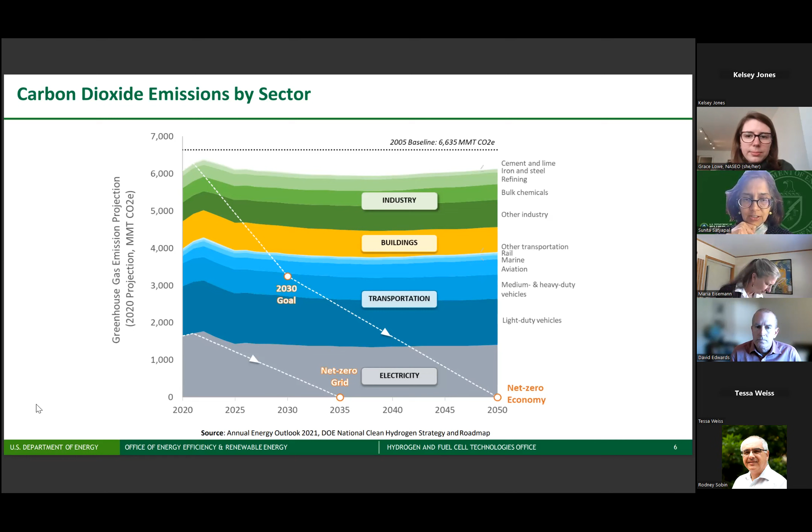And if we go to the next slide, this shows, I think, hopefully many of you are familiar with our H2@Scale initiative shown on the left, and really looking at all of our resources. Once we produce that hydrogen, use it as a fuel, as a feedstock. And there are two main documents for those who are maybe not as familiar with the DOE program: the program plan, which was published in 2020, and then the national strategy, which was issued as a draft. And we've had listening sessions as well with some of you on that.

And then the other thing I wanted to highlight just in the org chart picture is, again, there are many new offices involved in hydrogen on the federal side, but we really are trying to focus on cohesive, coordinated efforts. For those familiar with the office alphabet chart here: renewables, fossil with CCS, nuclear. We have a new Office of Clean Energy Demonstrations, our Loan Program Office. On the science side, ARPA-E, science, and cross-cutting supporting offices like the Office of Technology Transfer, International Affairs,

and so forth. So anyway, the main point is that we provide funding out to industry, labs, universities, states. And so I'd love to have more of a discussion on what more we can be doing with the states. And we're also, just for awareness, working really closely with our interagency counterparts specifically on hydrogen and addressing some of the challenges.

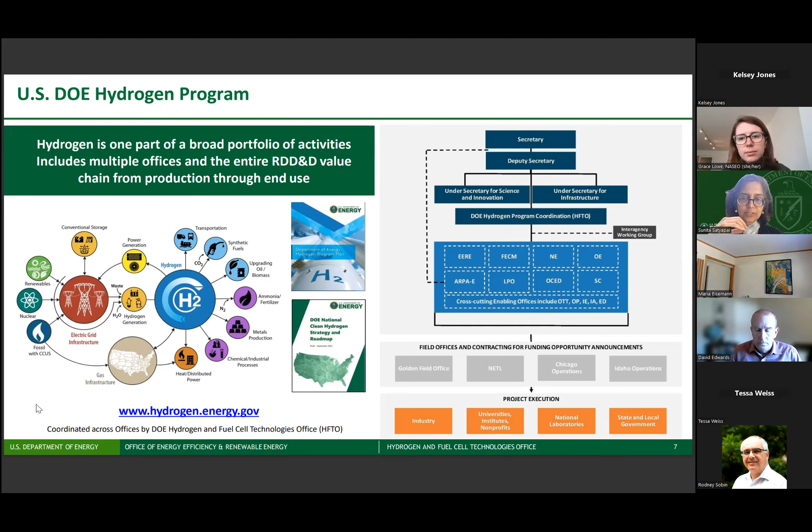So if we go to the next slide, here again, just as a snapshot, this keeps changing, so it's already out of date, but I think most of you know we produce roughly 10 million metric tons of hydrogen, about 10% of the global capacity. You can see that we have pipelines, we have three caverns, and then most of the states have hydrogen production capacity.

And then this maps out the PEM electrolyzers, and we'll have a new version of this. But also, just again, as a snapshot in time, the examples of deployments, since it seemed like the interest was really those end use applications. So stationary backup power, forklifts is an example, again, very specific. Infrastructure. I should have mentioned we have a joint office also with transportation. So we have quite a bit of infrastructure funding on the table.

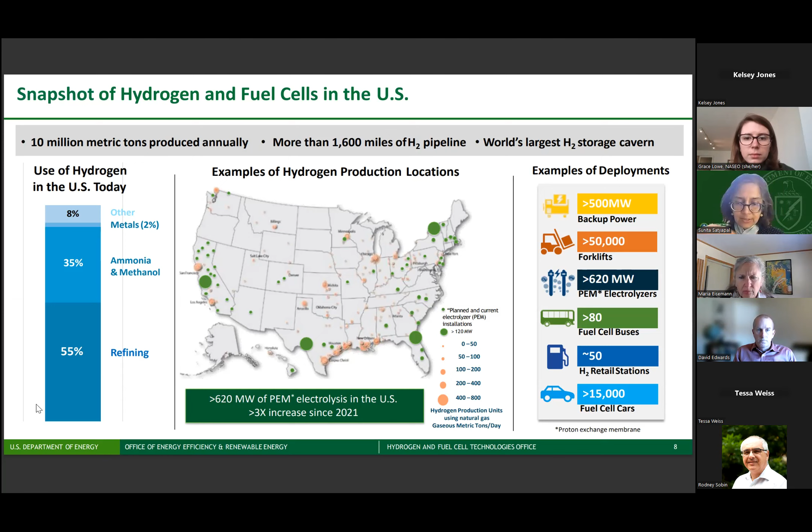But if we go to the next slide, and I'll go pretty quickly just to leave time for discussion. But again, from the perspective of the market, kind of market-driven end use applications, this lays the framework for the national strategy. And basically the national goals of 10 million metric tons of clean hydrogen by 2030, and then up to 50 million by 2050. And that's aligned with the White House long-term climate strategy of basically enabling about 10% of total national CO2 emissions

reduction possible with hydrogen. And then the picture kind of shows different end uses and how it might evolve over time, and basically catalyzing the use in the existing industries to start with. So, obviously like ammonia, refineries, and then initiating some of the newer uses as we see the infrastructure build out, the cost coming down. So like SAFs, there's a lot of interest, obviously, in exports. And then we see over time scaling up, especially as we get the infrastructure, heavy duty transport, energy storage as well, in terms of enabling a renewable grid.

And the key message, though, on this slide I wanted to emphasize is there's so much uncertainty. So if you look on the right, we have the dark green, which are core scenarios. So how much hydrogen for each of those sectors. And then the optimistic and kind of conservative scenarios with the light green. So especially now that we have the IRA, the hubs are not yet decided. I think it's really important for all of us to kind of have that humility and know that we don't know exactly what the number is going to be, but we'll keep updating this. And the key really is to set these kind of metrics in terms of what we see the opportunity is.

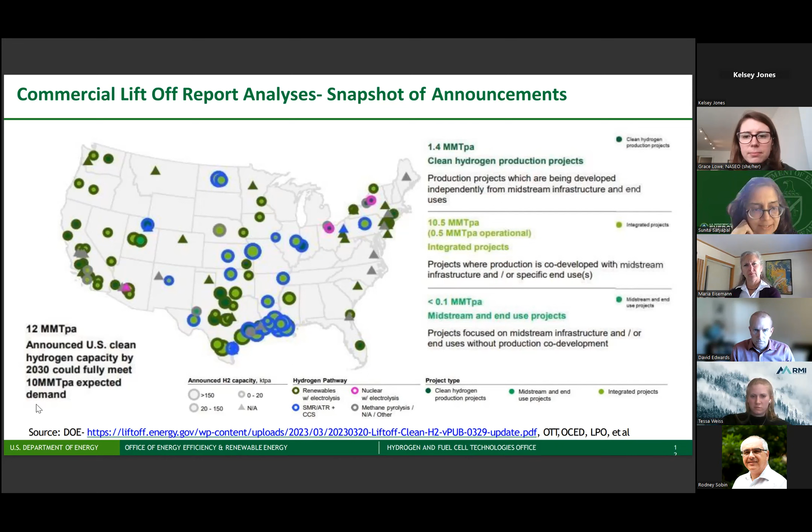And so if we go to the next slide, here again, because it was kind of a state and NASEO perspective, I thought it might be helpful to show this is from our H2@Scale analyses, and kind of where across the country you see the resources, wind, solar, biomass, starting to map out offshore wind. And then in our industrial decarbonization report, again, it's a little hard to see, it's in the national strategy, but where the potential end uses are, so across different industries.

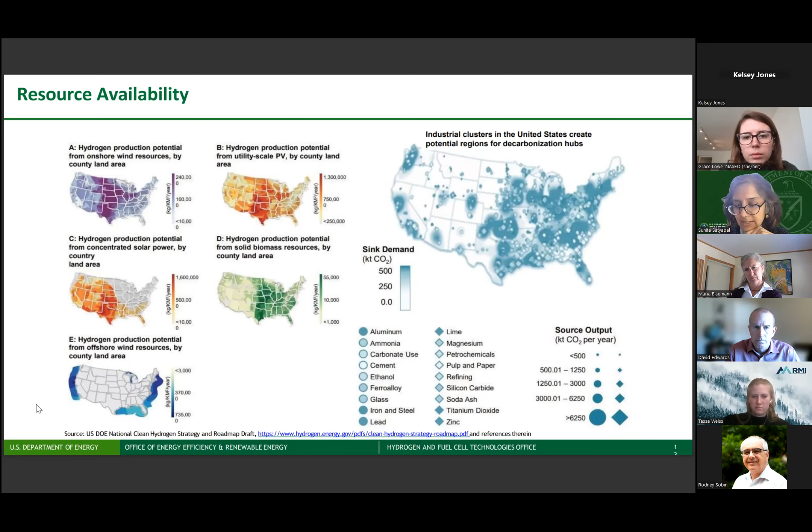And then here too, as we think really strategically, where could we see potential things? So, CO2, and where could there be hydrogen plus CO2, let's say long term. So again, mapping out this, I thought might be helpful for states to see. And then the next slide is also in our national strategy, but starting to map out where there could be potential storage, so large scale storage infrastructure.

So, obviously there's the salt domes. There may be some other opportunities, just the hard rock formations. We could use some of the depleted oil and gas fields. We have some analysis underway also on kind of the mini, let's say around 10 tons of storage. So something sort of in between the really large scale geological caverns. So again, that gives you an idea of where these are.

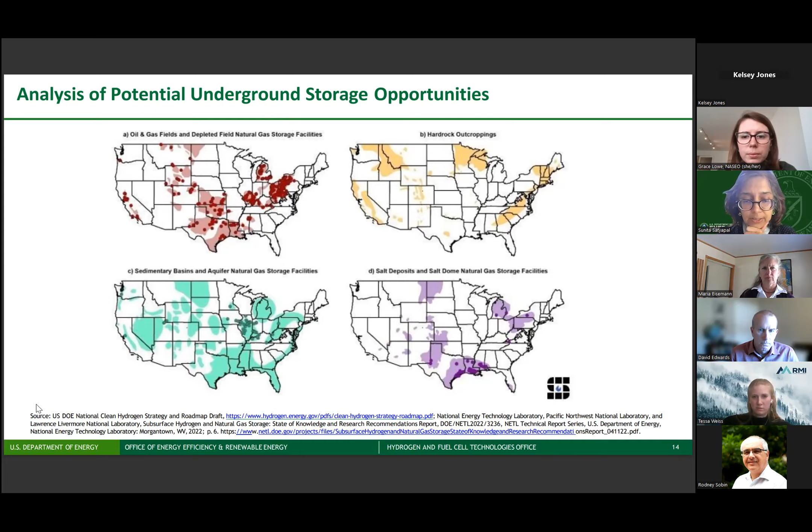So if we keep going, I think the last takeaway I wanted to end with was just the whole importance of collaboration, the DEIA, and environmental justice. We go to the next slide. As I think many of you know, a really top priority for the administration is energy and environmental justice, the Justice40 initiative, a lot of discussion on how do we really quantify those benefits. And so I thought I would just share one example of various activities, even internationally. So we have an H2 Twin Cities effort, partnering across continents, trying to share best practices, lessons learned, workforce.

I thought I'd do a shout out for one example of a project that we're funding with UPS. Trucks that actually double the range compared to the battery vehicle, and we'll have 15 in a disadvantaged community. And showing those really concrete benefits, I think, is really critical. So we get lots of questions, but CO2 reduction, air quality benefits, and so forth. We have another project with resiliency at a fuel cell microgrid. So just lots and lots of efforts there. So I just wanted to stress this and see if there are ideas that states might have on how we can work together on the EJ and DEIA activities. That would be great.

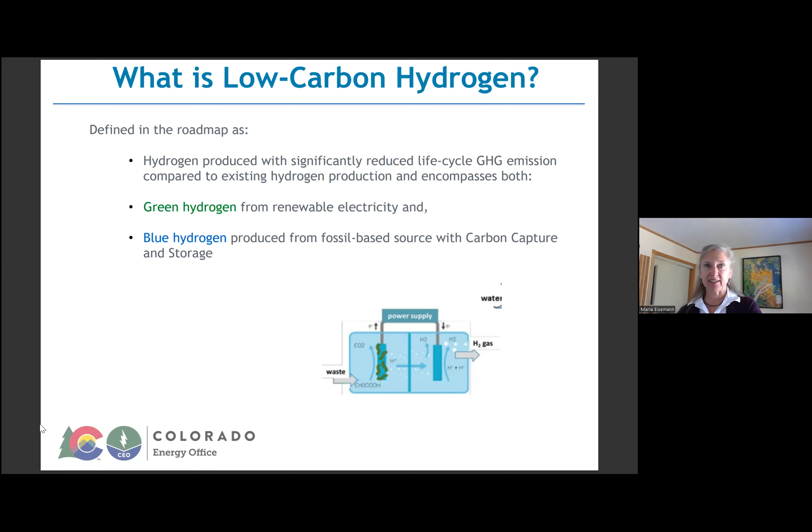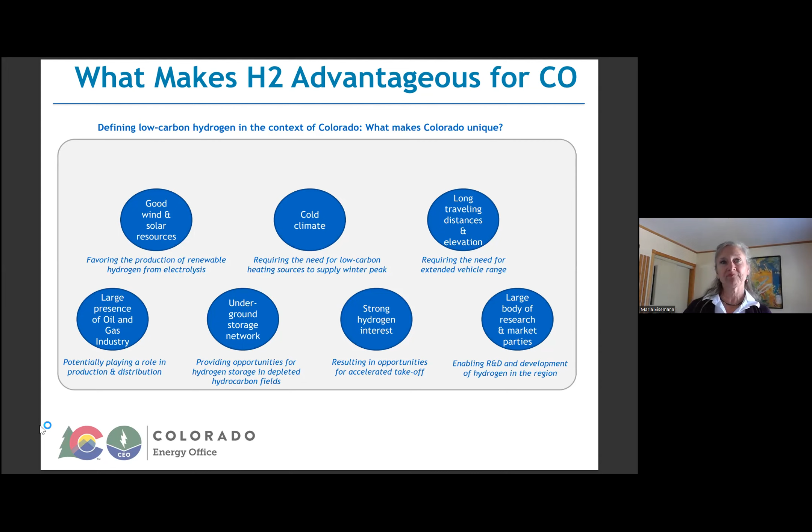So all the states have advantages for hydrogen, and Colorado has quite a few. It's a big state with high elevation, so vehicles need long driving ranges. We have a large oil and gas industry providing some infrastructure and opportunities for storage. And then we have a lot of interest in the state. We have a Colorado Hydrogen Network, and the National Renewable Energy Lab, as well as our universities, are really engaged, among other things, and a cold climate as well.

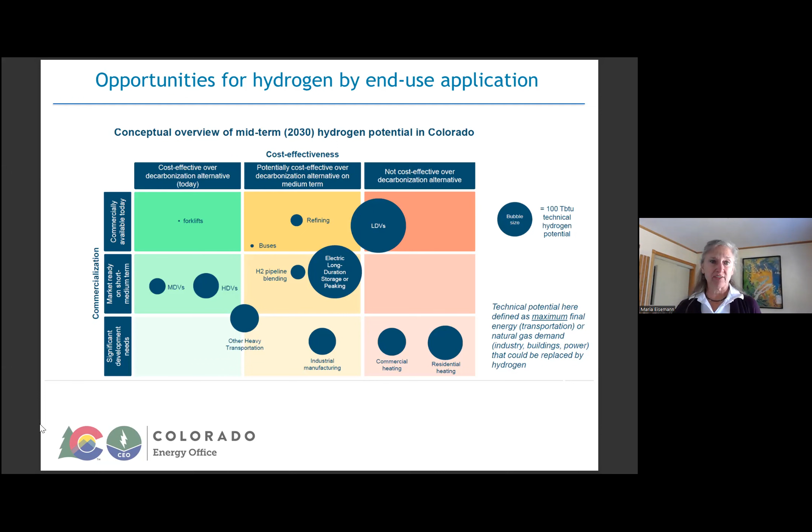There's also in the transportation sector buses, not as big of an opportunity there, but still a solid opportunity for the state. We have a really big opportunity in that medium category in electric long duration storage or peaking. And then on the industrial side, refining and industrial manufacturing. Way over on the right there, you'll see light duty vehicles and commercial and residential heating. And the reason those ended up on that side is because they were outcompeted by other low carbon opportunities such as electrification. Next slide, and I'll talk more about them.

Yeah, so I just wanted to share a couple more findings from the study. This talks about refueling costs in Colorado. Our study showed us that in order for hydrogen to be competitive with diesel, it would have to come in at $6 to $8 per kilogram by 2030. And we found that pump prices using off-site hydrogen production were the most cost-effective compared to on-site production now and in the future, because electrolyzers using electricity from the grid may have higher electricity prices than using off-grid electricity, like excess solar and wind, for example. The renewable type of sources there.

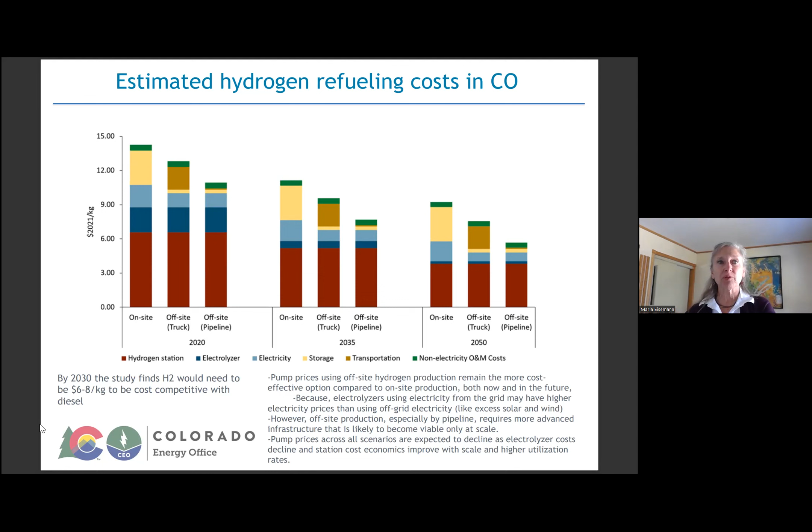However, off-site production, if it was coming in by pipeline, presented some cost challenges because you needed the infrastructure for it, of course, and that's likely to become viable only at scale. However, pump prices across all the scenarios were expected to decline as electrolyzer costs came down and the station economics improved with greater scale and usage. Next slide. And the other finding I'll share with you, again, both of them are in the transportation sector.

But again, when we're looking at medium and heavy duty vehicles, I'm going to show you just some of how the costs worked out. On the right hand side, we look at medium and heavy duty vehicles, and they're shown in the heavy duty vehicles segment that it's a more cost effective solution compared to electric vehicles now and in the future on a per weight basis, and that is because electric long range vehicles have a higher weight. That's because of the batteries they're carrying, and it provides lower cargo space, which brings up the cost for them to transport. And so hydrogen vehicles have an advantage there.

In the light duty segment, battery electric vehicles remain a more operationally cost-effective option now and in the future, as they have better fuel economies and lower fuel costs than the light duty fuel cell vehicles. Next slide.

So we released our study in October, and in November out came the IIJA. What our study recommended is that we should develop a hydrogen plan, investigate market interest and feasibility of an early development hydrogen hub, develop some pilot projects in the power sector and in the blending of hydrogen in existing gas infrastructure, and then issue a request for information to potential hydrogen market participants to assess the feasibility of pilots. Next slide.

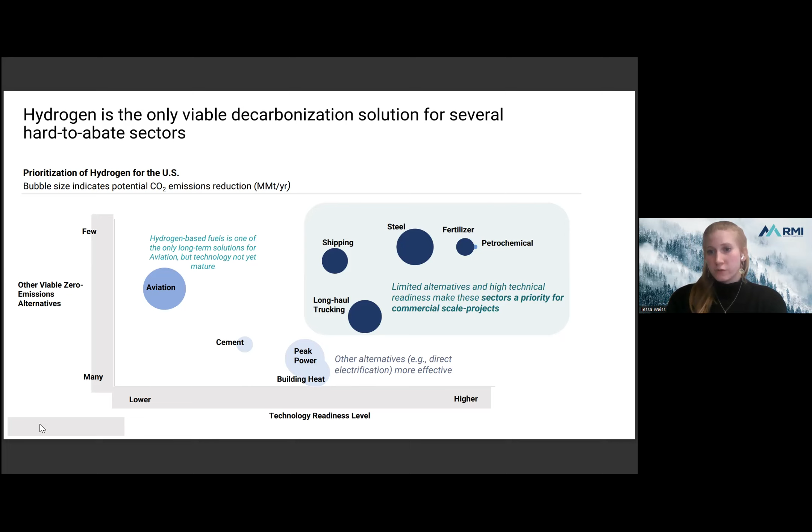We do view use of hydrogen for applications where there are other decarbonization alternatives, oftentimes alternatives that are more efficient in terms of the amount of energy they need to achieve this emissions reduction, to be better suited for a non-hydrogen based application. So thinking about peaking power or building heat, oftentimes being well suited for use of electrons directly. Going to the next slide.

To provide high level perspective on the emissions impact we see of hydrogen's replacement of the various present day use of fossil fuel in this sector, we see steel being a front runner in terms of the emissions reductions that we can see through replacement of coke and coal with the clean hydrogen alternative. All of these are benchmarking of fossil fuel with a zero carbon hydrogen based alternative, followed by really these heavy industrial, heavy transportation applications. We see, as I alluded to, use of hydrogen for power generation and building heat achieving a far lower emissions reduction.

This is largely coming from the low amount of energy that is stored in a certain space of hydrogen. So hydrogen takes up a lot of space to achieve the same amount of energy that, say, natural gas does for power generation or building heat. And when we start to replace natural gas with hydrogen, we do not see an equal emissions reduction per the amount of hydrogen that we are replacing on a volume by volume basis. So for example, if I were to blend natural gas with hydrogen, 20% of that being blended on a volume basis, only 7% of the emissions would be reduced. Going to the next slide.

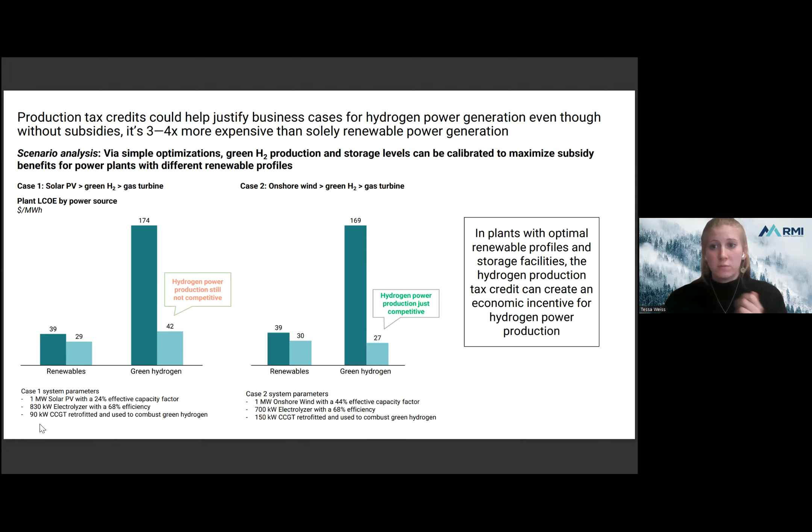And so this is a dynamic that I encourage us all to be aware of: how do we think about short-term versus long-term planning, and how are we thinking about making decisions at this point in time in light of the false economic structuring and incentives that we see compared to the lifetime of these 20-year-long assets. If we go to the next slide.

So we've also looked at a risk of what could investments in these, say, non-priority, largely baseload power or building heating applications look like in terms of our holistic ability to decarbonize. So from an efficiency perspective, using green hydrogen as opposed to just using renewables directly will result in over 60% less net electricity generated from your system. And this is because it's largely inefficient to take solar or wind power, create hydrogen to create electricity again, as opposed to using those electrons directly.

And this creates a risk as far as meeting any sort of state or federal goals in terms of rollout of renewables, in terms of if I'm allocating my limited amount of renewables for applications that are 60% more inefficient in terms of their power generation, I am taking away availability of resources to be used to directly decarbonize other applications. And from that systems level perspective, we don't have an abundance of resources to be used, and we really do need to be thinking about what is the efficiency in terms of energy use, as well as long-term cost projections that we will see of these technologies.

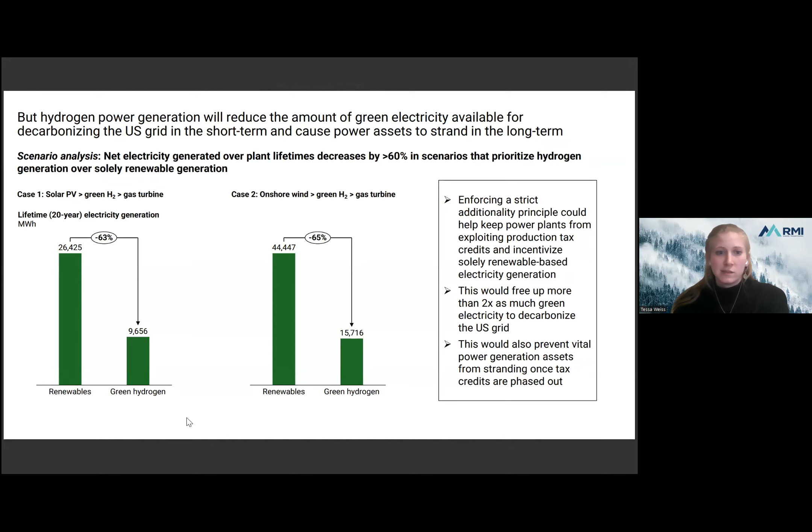Excellent. Thanks so much, and thanks for the invite to have an industry spokesperson in the room today for the discussion. I have the luxury of going last, which means I can take advantage of all the great presentations that have preceded me because they have covered almost all of the points that I would want to make on background on hydrogen. So in an effort to shorten things up and get to the discussion, which is probably more interesting, I'll skip over a few of my background slides, but let's go to the next slide.

My name is Dave Edwards. I work for a company called Air Liquide. We're a very large industrial gas company. We work in almost every country in the world, and we produce almost every industrial gas from oxygen, nitrogen, helium, carbon dioxide. Hydrogen is at the core of our growth, and for now is getting a lot of attention within our business. I will have some Air Liquide specific slides as I present, but I'll try to give an industry perspective as much as an individual company's perspective. If you go to the next slide.

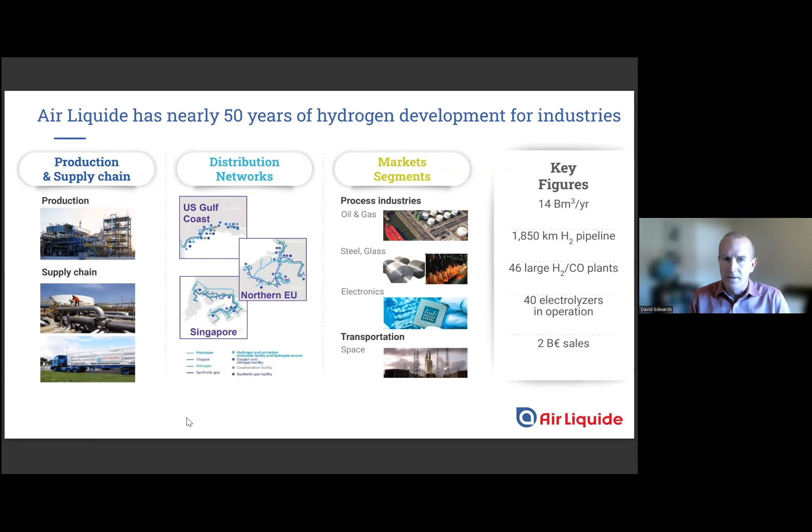From an Air Liquide perspective and from an industrial perspective, we've got nearly 50 years of experience in this industry, but mostly, as you've already seen, that industry is focused on things like refineries and ammonia production. It's through large industrial sectors like the Gulf Coast of the United States. And even though we're already producing it at very large scale, in very large quantities, those molecules generally aren't available and aren't low carbon enough for the new needs that we're talking about in the energy transition. So let's go to the next slide, and the next slide after this one.

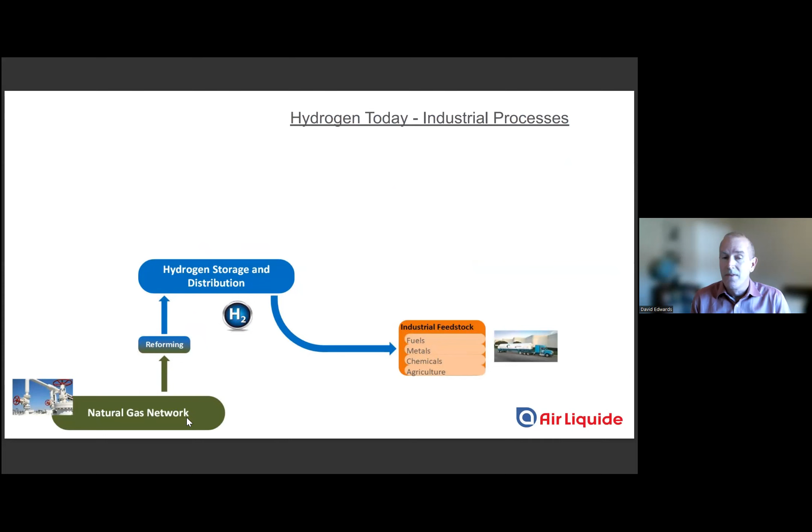So today's model, and I have a spider diagram that looks similar to Sunita's, and almost every slide has one, but today's industrial processes are really quite straightforward. We start with generally a fossil gas network. Through various reforming processes, we produce hydrogen. In most cases, that goes into pipelines or is produced on site where it's needed, and it's going to these existing industrial sectors. As we go to the next slide, you're going to see a lot of additions.

Everything that gets added between the last slide and this slide are now the things that are opportunities in the new energy transformation. Every blue line represents an investment in infrastructure. How are we going to get hydrogen to these new applications? Everything in orange on the right are these new applications in mobility, in power generation, industrial uses, and in commercial and residential heating, for example.

And at the left side of this, it's all of the new renewables that need to come online in order to enable the production of hydrogen, keeping in mind that there remains a hydrocarbon-based production and renewable hydrocarbons through things like renewable natural gas, but predominantly through the electrolysis process, either from the grid or from behind the meter, wind and solar, but also leveraging things like nuclear and hydropower and other low carbon electricity production sites.

So keep in mind that all of the new stuff on this slide are the things that we're talking about. And each one of these elements, each box or each arrow represents hundreds of millions of dollars of investment to match the kind of investments we've made over the decades in the industrial sector that I showed initially. Let's go to the next slide.

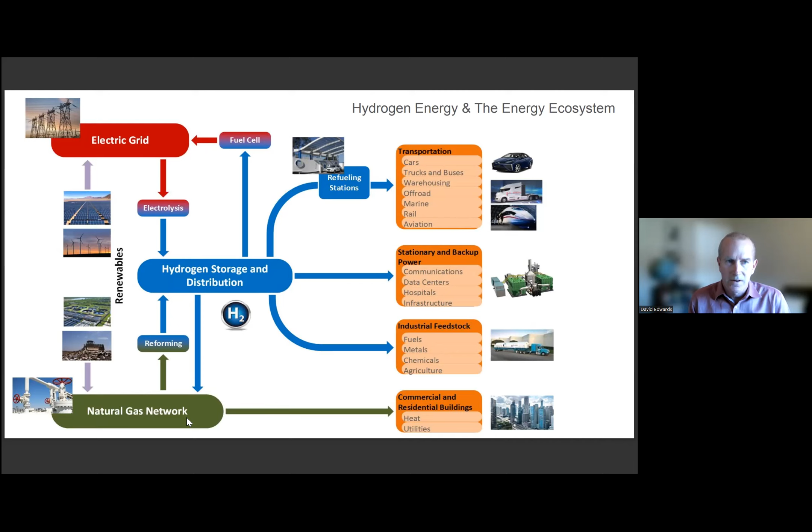When we think about the renewable grid, the role for hydrogen is multi. One is we're using the grid or electricity as a feedstock through electrolysis to produce that hydrogen, but we're also complementing the grid by providing large-scale energy storage. As we think about unbalanced supply and demand from wind and solar, we have a need for large-scale storage. Large-scale storage and long-time storage is enabled by hydrogen. Hydrogen storage in caverns, hydrogen storage as a liquid, a number of different mechanisms.

And once that hydrogen molecule is generated, it has value in multiple pathways. We saw in the previous presentations that it can go into the mobility markets, it can go back into power generation, it can be used for backup power, and it can be used in the industrial sectors. So unlike a lot of other energy storage options, hydrogen has the option of interconnecting to new sectors in ways that the other large-scale storage might have difficulty with.

And I put in a data point to give an example of what we're talking about with scale on the basis of Texas. Texas today, these numbers might be a little bit out of date, has about 29 gigawatts of power in the state, the largest state in the US for wind power production, with something like 25,000 wind-related jobs. If we could redirect all of that electricity into electrolyzers and into fuel tanks, it would be enough fuel for every car that's in Texas. So you can get a feel for the scale of the kind of problems we're trying to solve.

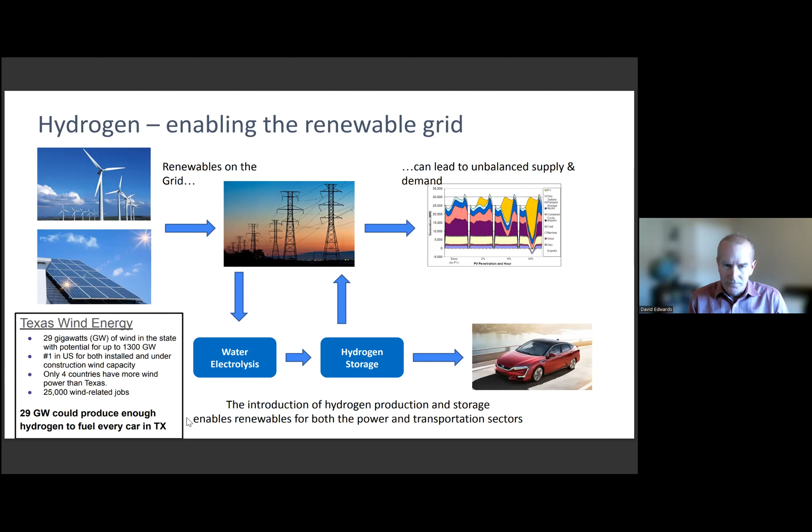Just to give some examples, I know Sunita showed a map with a lot of green and blue dots on it. A couple of those dots are actually real projects, and industry is stepping into this new arena by making fairly significant investments, and I'm showing two here that our company has made. The first is a new production facility in Nevada. We spent about $250 million to bring a 30-ton per day liquid plant online. That plant is operating today and providing fuel into the West Coast markets, mostly to California. A lot of that is going to the existing light duty stations, but a lot of it also going into warehousing, for example.

And then on the East Coast in Quebec, we made a $40 million investment in an electrolyzer. At the time, it was the largest electrolyzer operating. I think that has been surpassed now many times over, but it's producing 8 tons of liquid for the East Coast markets in Canada and the United States. That system's now been operating for a couple of years.

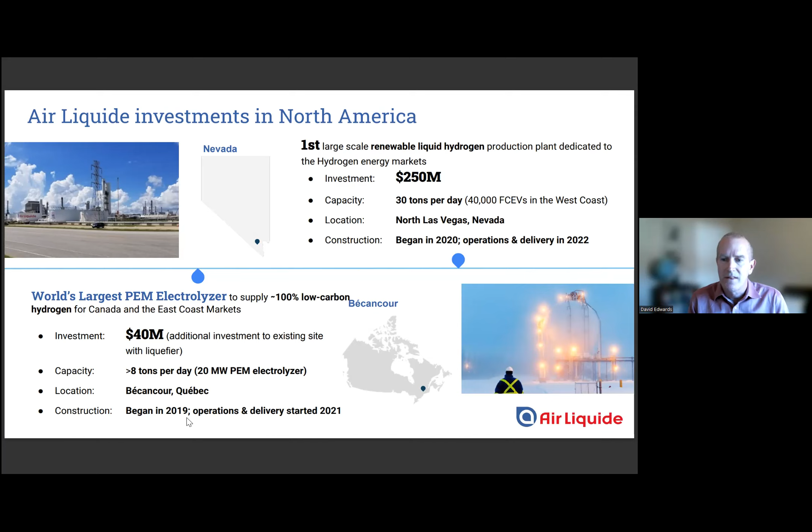And so when you see those kind of maps that Sunita shows, even though a lot of those might be speculative about future investments, they do represent hundreds of millions of dollars of investment, and it's building on that existing industrial infrastructure that's in place for the existing markets. Let's go to the next slide. And the next one after this.

So I have two slides that bring an industry perspective to some of the things that we think about in the hydrogen markets. The first is the importance of markets and scale. When we think about policies at either the state or the federal level, we have to balance the priorities of the populace. There are environmental outcomes, economic outcomes, and societal outcomes. We have to have things like the greenhouse gas reductions, but don't underestimate the health effects of reducing the emissions from heavy duty vehicles, for example.

Greenhouse gases is a global issue that needs to be addressed, but the health effects are local. When you take a truck off of your local highway, that is your local populace health that's impacted directly. From an economic perspective, we have to have affordable, available, and reliable energy. It's unacceptable to have anything else.

That energy, if it can be domestic and can drive local investments, becomes well coordinated then with the policy of a state, for example. And then in the societal aspects, I know Sunita had a couple of slides on the DEIA activities and disadvantaged community impacts need to be addressed as part of these investments, for example.

And just a few sort of motherhood statements at the bottom that all of these solutions require scale. It doesn't solve any of the societal problems we have if we don't do this at the kind of scale that we need on a national energy level. But that scale is going to require private investment. In the end, it's private investment at an order of 10 to 100 times government investment that leads to the kind of investments we're looking at. But that requires balance in the market to be encouraged by policies, especially in the early days of adoption.

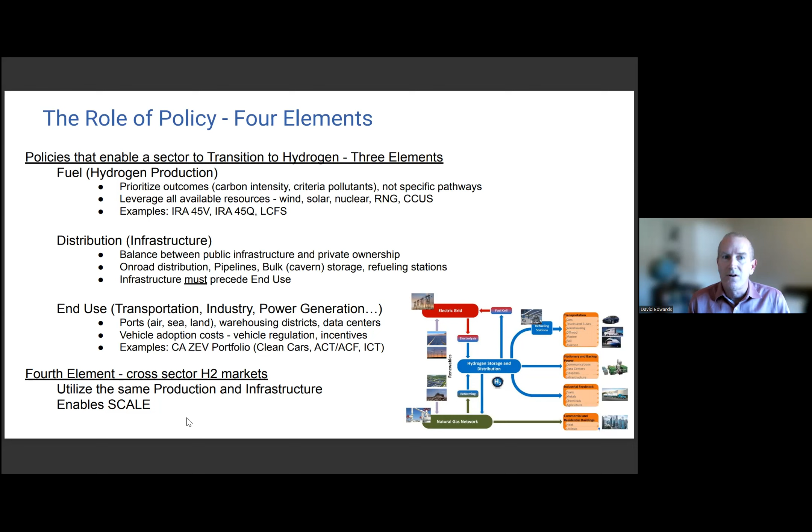And then the last element that sometimes we skip when we think about hydrogen is the value of cross-sector markets. If you only focus on a single sector, such as transportation, you don't utilize and you don't result in the kind of scale that brings the cost and economic and environmental impact to bear. And so think about how you can utilize the same production and distribution infrastructure to enable scale across those different sectors. And if we go to the next slide.

And so to summarize just the points that I've made, hydrogen has the potential to enable the transition. Scale is the important characteristic. But we would like to see policies that encourage the outcomes that best enable these markets and these drivers. And that's in fuel production, distribution infrastructure, end use, and the cross-sector growth.